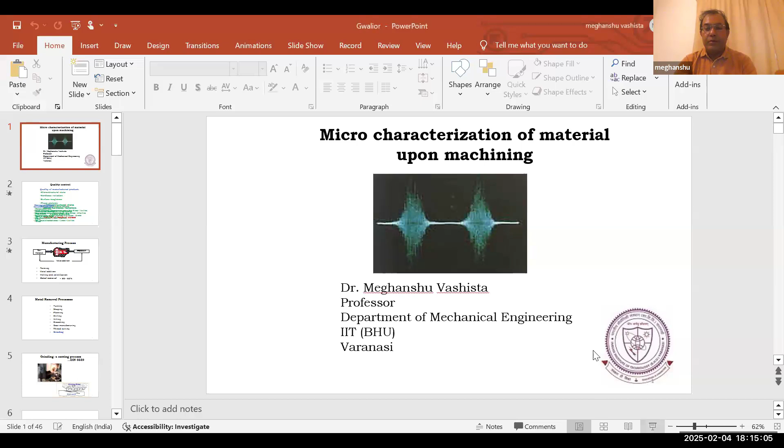The screen is visible? Yes sir, visible. Okay, so the topic of my talk, I have intentionally opted as micro-characterization of material upon machining.

Nowadays in the new industrial era, or Industry 4.0 scenario, it is very much necessary to characterize the material at the micro level, because we are going for micro manufacturing and nanotechnology. Similarly, we have also opted for micro characterization of material for improvement of quality. I have also opted this topic for machining because if we consider the machining operation's contribution in manufacturing, it is very large. So the topic of my talk is micro characterization of material upon machining, and this slide has a figure.

That figure is an indication of a signal that we will discuss during the presentation of this lecture, as this signal is very important for micro characterization of material.

Before starting micro characterization, let us discuss a very important term, that is quality control. What is the role of quality control in manufacturing, and why is it necessary to go through this?

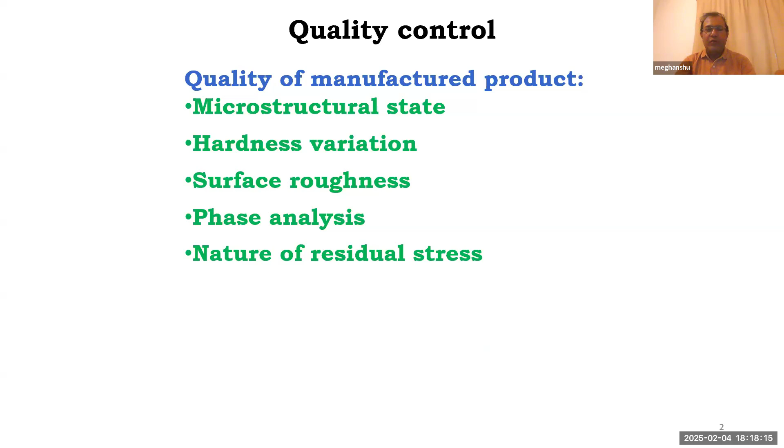Now, if we think about a manufactured product, we can judge its quality by its microstructure state, its variation of hardness from top surface to subsurface, surface variation, roughness variation, phase analysis, and nature of residual stress. So to judge the quality of a manufactured product or component, we have to assess all these parameters to check whether the quality of the produced component is okay or not. We have various conventional techniques for assessment of quality under these parameters.

We have the optical microscope that will assess the microstructural state. The cost of this microscope is around 15 to 20 lakh, and generally it takes 1 to 2 hours for assessing the metallography analysis. The micro hardness tester is an instrument used for micro hardness testing; its cost is also around 15 to 20 lakh, and the time to assess micro hardness is from 30 minutes to 1 hour.

The roughness tester is used for surface roughness. It costs 3 to 10 lakhs, and we generally take 10 minutes to use this instrument for assessment of surface roughness.

If we consider the cost of all these equipment, then it will be around 1.5 crore. And the total time taken for assessment of quality control is more than 2 hours. If we provide 2 hour time for assessment of quality control of a single product, then it is not feasible. So what is the answer with us?

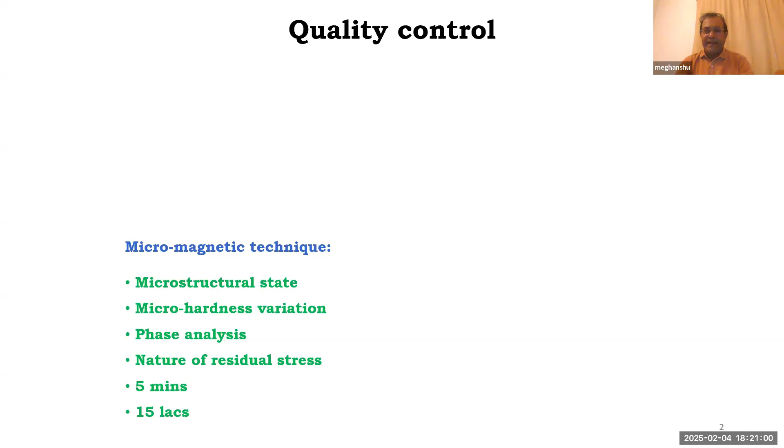This technique is used in case of manufacturing. What is the definition of manufacturing? It is conversion of raw material by some value addition into a useful product.

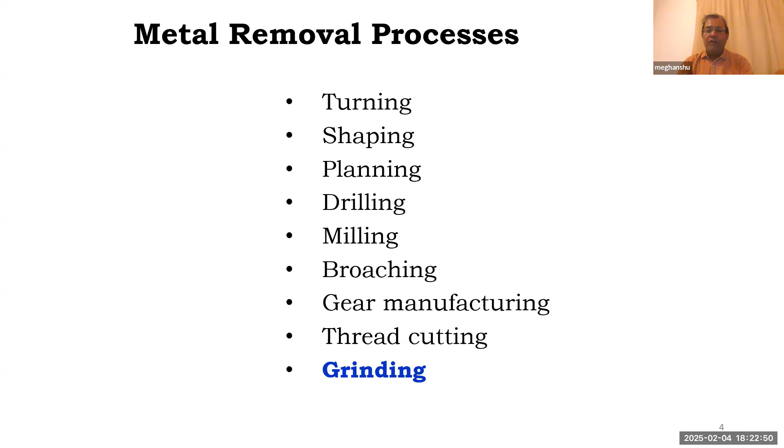Why have I kept this in blue color? Because among all these metal removal processes, or I can say among all the manufacturing processes, grinding is very important because it is used for surface finish improvement. And all the manufactured components, whether coming from welding shop, forming shop, casting shop, or machining shop, will definitely go through grinding operation. So grinding is a very important last tooling machining operation that decides the quality of the manufactured product.

Why is this heat generated in the grinding process? First, we have to see into this. In case of grinding, a grinding wheel is used, and this grinding wheel has various abrasive grits, which act as a cutting tool. In case of all machining processes like drilling, a drill bit is used; in milling, a milling cutter is used; in turning operation, a single point cutting tool is used. All these processes use a cutting tool. But in case of grinding, the grinding wheel is not a cutting tool - it has abrasive grit, and these abrasive grits act as the cutting tool.

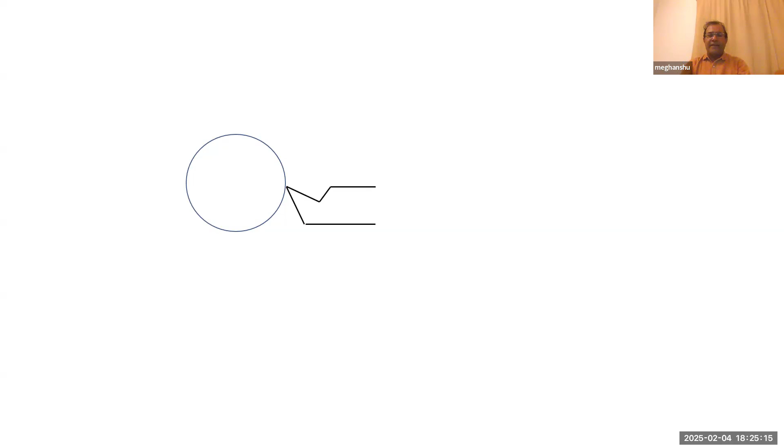We all know that if we are having a circular workpiece and a single point cutting tool, then this is the schematic of this workpiece and single point cutting tool. This single point cutting tool has a surface over which the chip will flow. The chip will flow over the rake surface, and this is the rake surface that can be indicated here.

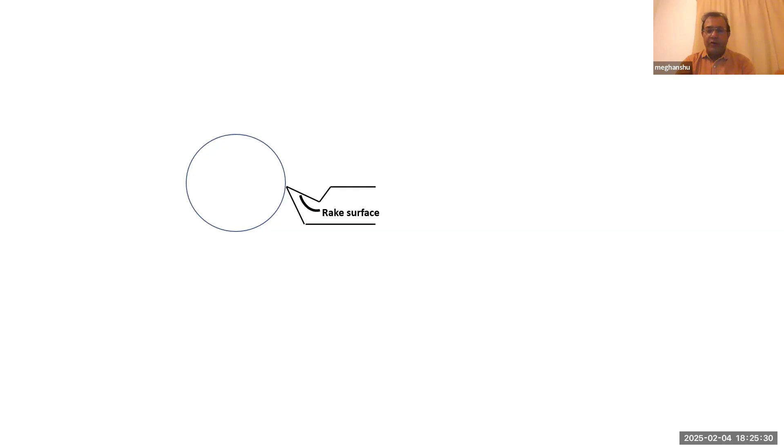To define whether the rake angle is positive or negative, we have to follow some basic principles or rules. First, we have to draw a direction, and that direction will indicate the cutting velocity.

In case of an actual turning operation, exactly at the point of contact between the workpiece and the cutting tool, we draw a tangent, and this tangent indicates the direction of cutting velocity. Then if we introduce a normal plane that is perpendicular to the cutting velocity, this plane is known as the reference plane. So we have the rake surface, the cutting velocity, and the reference plane, and these are required to define whether the rake angle is positive or negative.

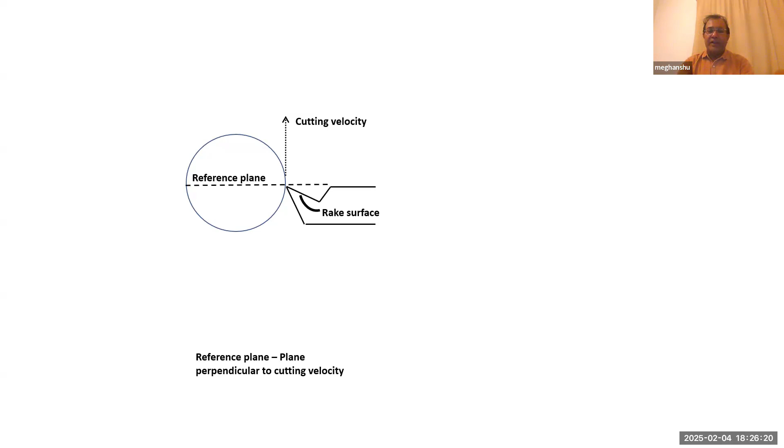If we rotate the reference plane towards the rake surface, and this direction of rotation is clockwise, then we can say this rake angle is positive. So in this schematic, if we rotate the reference plane, it is in the clockwise direction, so this angle is a positive rake angle.

Now for another schematic, let's repeat the fundamentals we discussed. First we draw a tangent at the contact point, which gives the direction of cutting velocity. Then we introduce a plane normal to the cutting velocity, and this plane is the reference plane, introduced exactly normal to the cutting velocity.

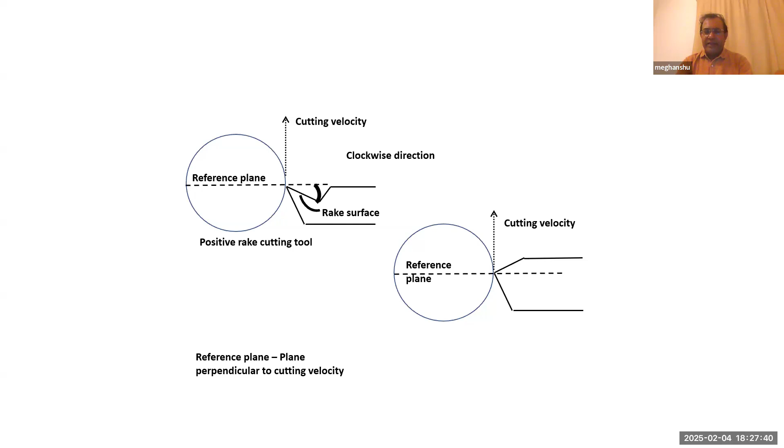Now, if we repeat the same process, we can determine whether it is a positive or negative rake angle. In this figure, if we rotate the reference plane towards the rake surface, the direction of rotation is anti-clockwise. Since the direction of rotation is anti-clockwise, we can say this is a negative rake angle.

So what is the utility of positive rake angle and negative rake angle? In machining, we can control the geometry of a single point cutting tool by providing a positive rake angle or a negative rake angle.

How does positive rake angle and negative rake angle affect machining? Suppose this segment indicates a chip flowing over the rake surface, and in this case the tool is a positive rake tool. V1 is the velocity of the chip before machining, and I am considering that after machining the velocity of the chip is V2. So what happens if we machine this workpiece material with a positive rake cutting tool?

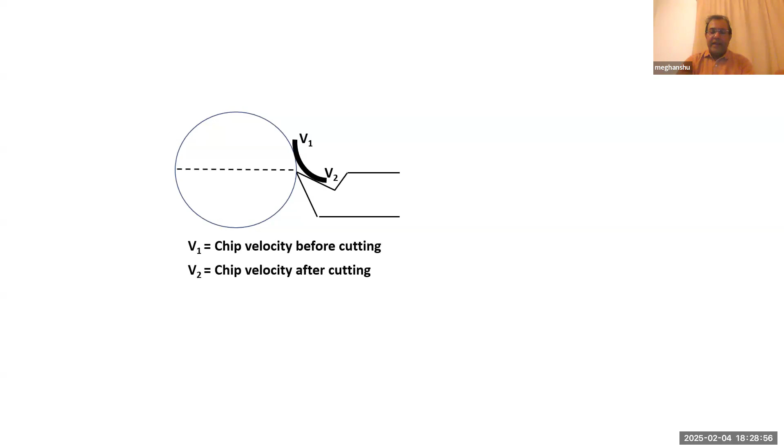Considering V1 as the chip velocity before cutting and V2 as the chip velocity after cutting, and the mass of the chip as m, I can write that mv1 is the momentum of the chip before machining, and mv2 is the momentum of the chip after machining.

Now consider machining by a negative rake cutting tool. In this case, this will be the flow of the chip. V1 is the velocity of the chip before machining, and V3 is the chip velocity after cutting. Here V1 and V3 are the velocities in case of the negative rake cutting tool.

So if we consider the change in momentum in case of the positive rake cutting tool, it will be mv1 minus mv2, and the change in momentum in case of the negative rake cutting tool will be mv1 minus negative mv3. This change in momentum for the negative rake cutting tool will always be higher than for the positive rake cutting tool, indicating that the cutting force is much larger in case of machining with a negative rake cutting tool, and that is not desirable.

Large cutting forces are always generated in case of machining by a negative rake cutting tool.

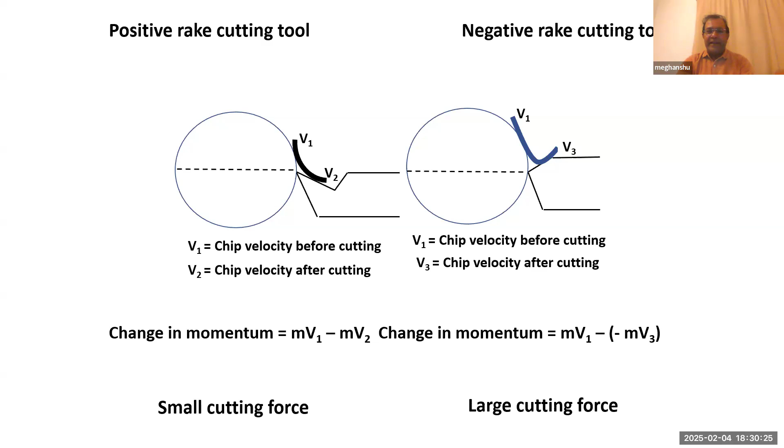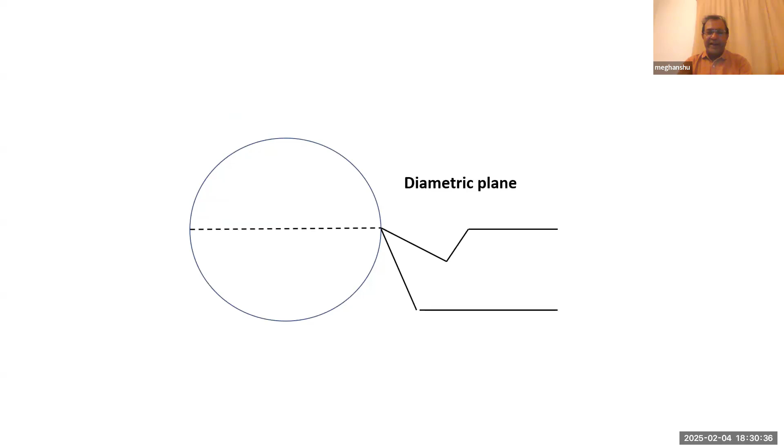In case of machining, one important fundamental is that the cutting tool should always make contact exactly at the diametric plane. Why should the cutting tool always make contact with the workpiece at the diametric plane? This is also a very important aspect related to tool geometry.

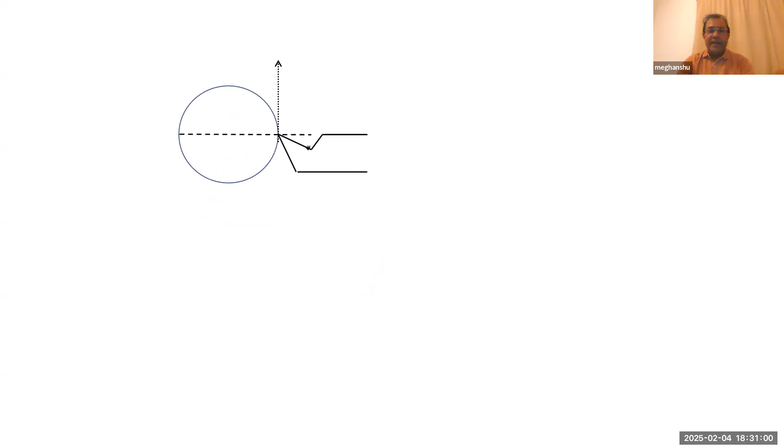If we consider that the cutting tool is having contact point exactly at the diametric plane, then this is the situation, and in this case the angle is positive rake angle. We can see that the pi-r plane or reference plane, when we move it towards the rake surface, it is clockwise direction. Rake angle approximately will be around 10 degree.

When the cutting tool is making contact above the diametric plane, what will happen? If we plot the cutting velocity and the reference plane, then this rotation will be more. So when we rotate the reference plane toward the rake surface, the value of rake angle will be different, but it will be positive. We have changed the rake angle from 10 degree to 15 degree by keeping the position above the diametric plane.

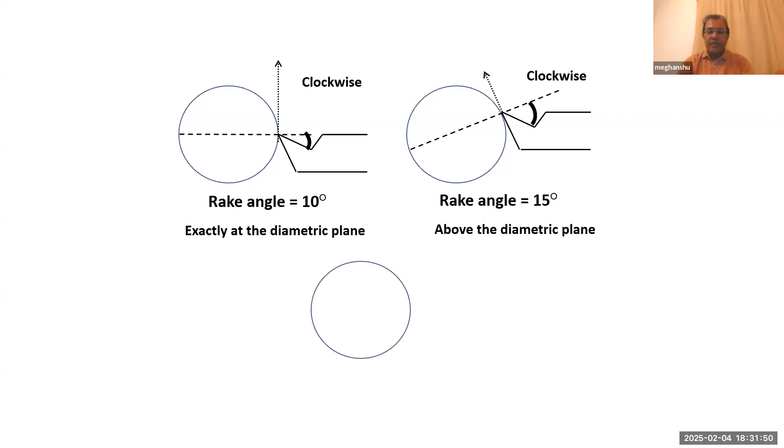Let us see what will happen when we have the position of cutting tool below the diametric plane. Suppose this is the location of cutting tool making contact with the workpiece surface below the diametric plane. This is the direction of cutting velocity exactly at the contact point. If we draw a tangent, then this will indicate the direction of cutting velocity.

If I introduce a normal plane to this cutting velocity, then this normal plane is the reference plane. According to fundamental, I have to rotate the reference plane towards the rake surface. If I rotate this towards the rake surface, then this angle will be negative, because the direction of rotation of pi-r plane towards the rake surface is anti-clockwise. So this rake angle is negative.

So I have been given a cutting tool. The tool geometry is indicating that the rake angle is 10 degree. But if I change the location of this single point cutting tool over the workpiece surface, then I will change the rake angle of the cutting tool, and that is not desirable. So we always have to keep the contact point exactly at the diametric plane.

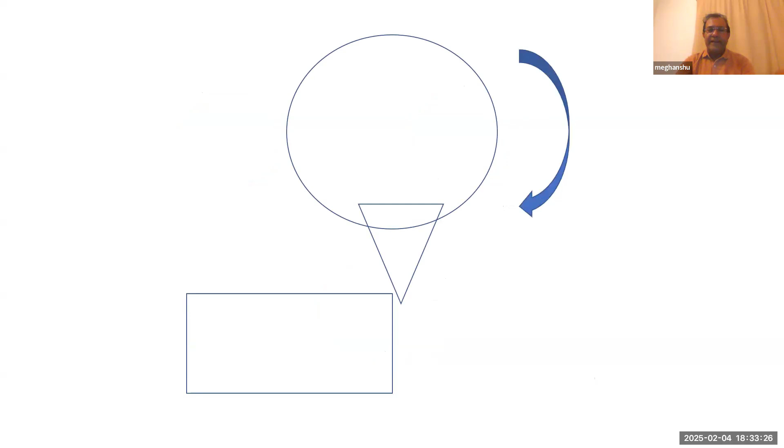Now, what will happen in case of grinding? Suppose this is a single abrasive grit, and this rectangular box is the workpiece. At the contact point, the grinding wheel is rotating and the abrasive grit is making contact. If I plot a tangent, then this is the direction of tangent, indicating the cutting velocity.

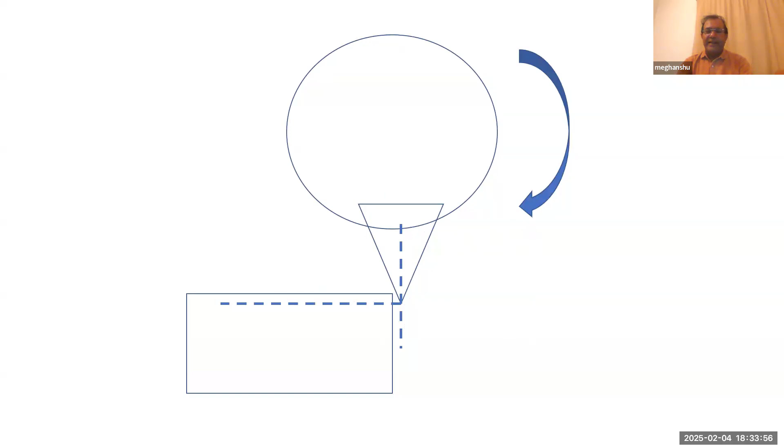This normal plane is indicating the location of reference plane, and the chip surface is the rake surface. So we can say that if we rotate the reference plane towards the rake surface, it is clockwise, and this is indicating that we are machining with a negative rake cutting tool.

Unfortunately, we are machining or providing surface finish to the manufactured component by a cutting tool having negative rake angle, and this negative rake angle is highly negative. Whenever we provide the negative rake angle, we generally keep its value around minus 10 degree to minus 15 degree or minus 18 degree at most, because if we increase the negativity of rake angle, then definitely a large amount of force will be generated and a large amount of heat will be generated, and that is not desirable.

But it is very unfortunate that we do not have any control over the geometry of these abrasive grits, nor are we able to control their shape in case of grinding. That is why we are using highly negative abrasive grit in this machining operation, which generates spark. And spark danger is something we have seen.

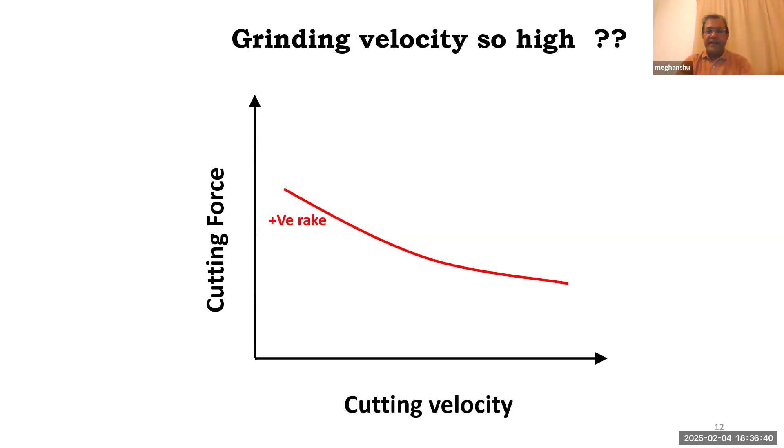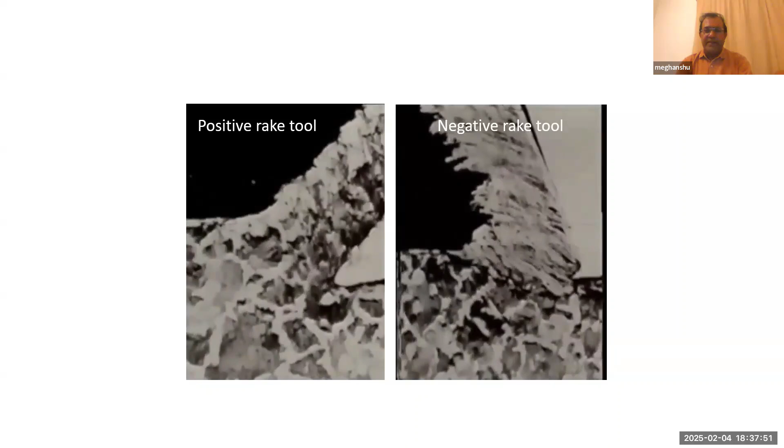This is a simulation video of positive rake cutting tool machining and negative rake cutting tool machining. You can see that in case of machining with negative rake cutting tool, the large amount of plastic deformation of the workpiece surface clearly indicates that large cutting forces are generated during machining. You can see the chip formation in case of negative rake cutting tool, having large serration marks at the top surface, indicating that a large amount of force is generated in machining with negative rake cutting tool. So this is not desirable.

We have seen that in case of grinding operation, the last tooling operation, sparks are generated and we cannot control the sparks because the abrasive grit that we are having has a large negative rake angle, and this large negative rake angle produces a large amount of heat. This large amount of heat is transferred or transmitted during the machining. Various sources act as transfer media in case of this heat transfer.

What are those sources which act as transmitting media for transfer of this heat? Coolant is there, air is there, which transfer some amount of heat. Some amount of heat will go to the chip, and a very small amount of heat will go toward the grinding wheel or abrasive grit. Why is very little heat transmitted towards the abrasive grit? Because generally we use abrasive grit made of alumina and silicon carbide, and these materials have poor thermal conductivity. That is why very small amount of heat is transferred to the abrasive grit, and because of the high thermal conductivity of the workpiece, a large amount of heat is transferred to the workpiece.

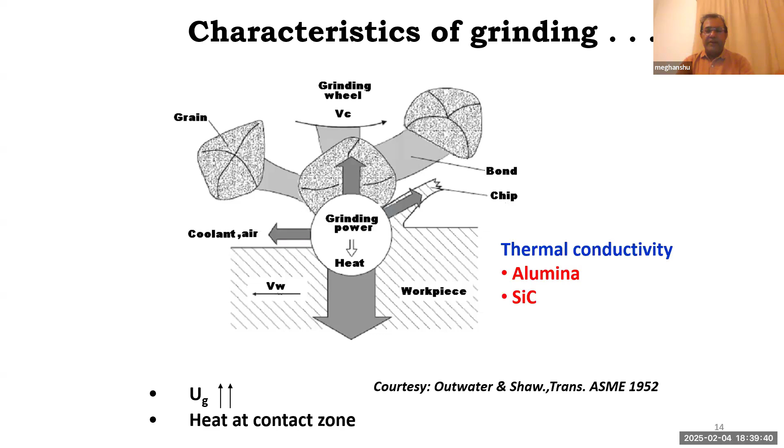You can see the large size of the arrow, which indicates that a large amount of heat is transferred to the workpiece. This is also not desirable for quality control of the workpiece, because it will affect or distort the quality, and the detrimental quality of the workpiece is not desirable for the customer or for the field application.

This elevated temperature condition or grinding heat will induce grinding burn. It will also result in metallurgical changes, micro hardness variation, surface and subsurface cracks, as well as introduce tensile residual stress in the workpiece component or manufactured product.

This tensile residual stress is detrimental. According to literature and the research outcomes of various scientists, tensile residual stress is a main problem in grinding, and it is not desirable by any customer. This tensile residual stress detrimentally reduces the static strength and fatigue life of the product.

So why is this tensile residual stress detrimental? Suppose I am having this component. If it undergoes some manufacturing process that induces compressive residual stress, that means the direction of residual stress will be compressive, and it will compress the component. In that case, if the component has voids, porosity, or cracks, all these will be suppressed, and their size will be reduced because of this compression action by the compressive residual stress.

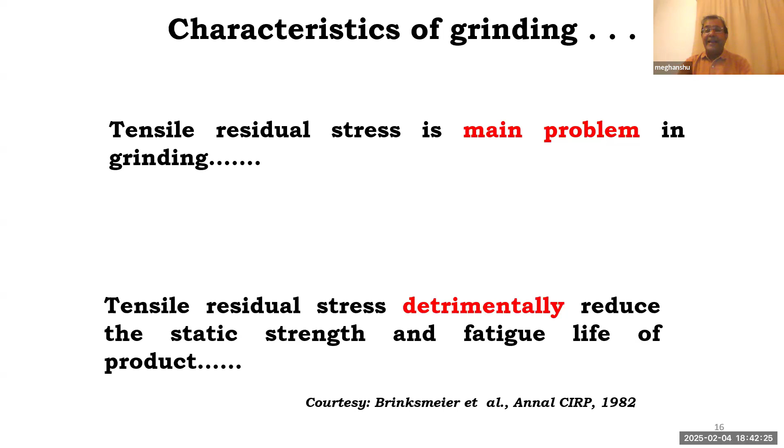That is why we have to always assess the tensile residual stress. It is very much important in comparison to other parameters like microstructure, micro hardness, or surface roughness. We can manage the surface roughness, we can play with poor surface roughness, but if the component is having tensile residual stress, then it will be very much detrimental.

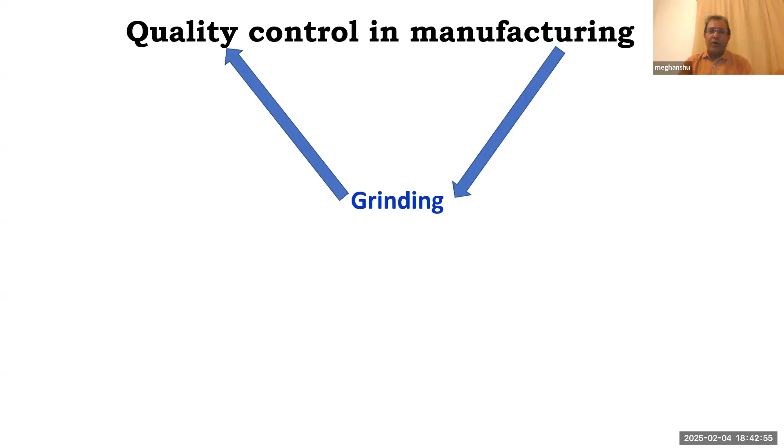We have seen that in case of quality control in manufacturing, we have a last tooling process. In manufacturing, this last tooling process is called grinding, and grinding uses abrasive grit which has a highly negative rake angle. Because of this high negative rake angle, it induces heat, and this heat will reduce or destroy the quality of the product, because it induces thermal damage in terms of induction of tensile residual stresses.

These tensile residual stresses are very much detrimental as per the global industrial record, or as per the outcome of research scientists who are working in the area of manufacturing.

So if we consider this block as a component, and this component has cracks at the surface level, the component is also having void or free space, and it also has some porosity. So we know any manufactured or produced component is not 100% accurate because it has all these imperfections or impurities.

So if the component has all these impurities and also has tensile residual stress, which will elongate the component in this direction, what will happen to these cracks, porosity, or void? All these will get enlarged like this. You can see enlargement of crack, enlargement of void, enlargement of porosity. So when these get enlarged, they will detrimentally reduce the static strength and fatigue life of the component.

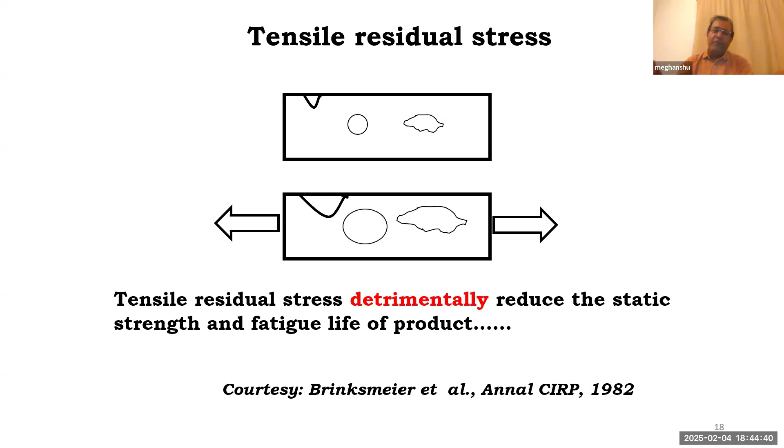That is why trusses, bridges, or other important structures, if they have this tensile residual stress, fail before their service life. You have seen in the news that there is a crack over the bridge, a crack over the trusses of a railway overbridge, or cracks over the railway track. Why are these cracks coming? It is because of induction of tensile residual stress inside the manufactured product.

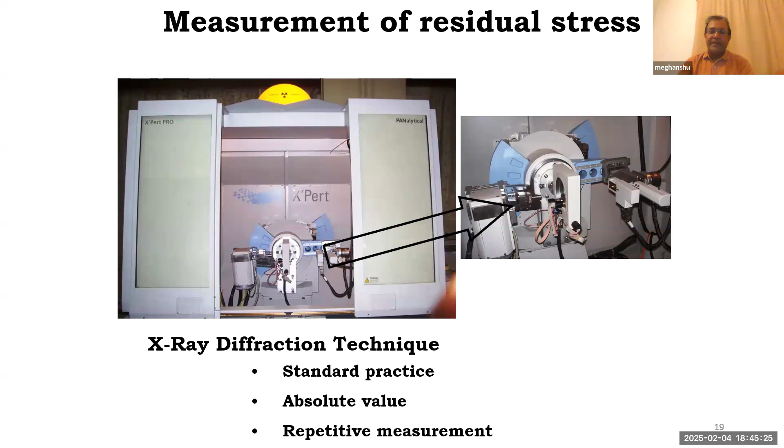We have to measure the residual stress, and a very popular and well-established technique is X-ray diffraction technique. This is a standard practice for measurement of residual stress. It provides an absolute value in megapascal of the residual stress, and the measurements are repetitive. That is the advantage of this technique. This technique is based on Bragg's law.

But there are some limitations of X-ray diffraction technique. What are those limitations? The limitation is that measurement time is higher. In case of X-ray diffraction technique, we usually have to scan the component at 5 different locations, and this 5 scan will take a minimum of 55 minutes.

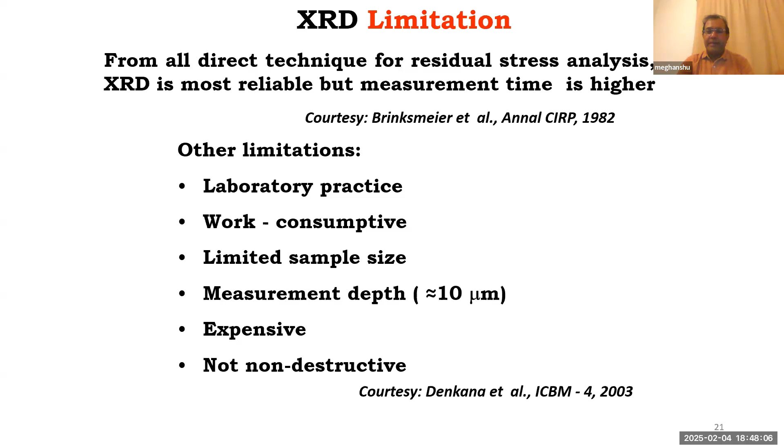Now we are having a very good micromagnetic technique. The name of that technique is the Barkhausen Noise technique, and this technique has various advantages, or superiority, over the established and popular X-ray diffraction technique.

This technique is faster. You can scan and get the complete history of any manufactured component within 5 minutes. The depth of penetration or depth of measurement is also very high in comparison to the X-ray diffraction technique, so we can assess more depth of the manufactured component.

The equipment is portable. It has a box shape with 7 kg weight. So you can carry this 7 kg equipment in your hand to the field application, to the railway track, or to the railway bridges, and you can assess the quality at the field.

Any complex shape can be analyzed, like a gear tooth or a spline shaft. They can be easily analyzed by this technique. And this technique has the biggest advantage: it is non-destructive in nature, so it's a user-friendly technique.

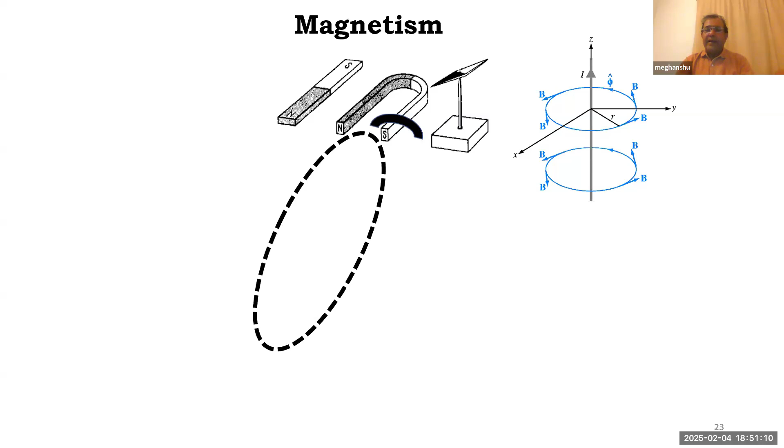So if we consider an electromagnetic field, it is generated by the flow of current. Any flow of current will generate a magnetic field, and the direction of this magnetic field is always perpendicular to the flow of current. Suppose current is flowing in this direction, then all magnetic field will be generated in the perpendicular direction to the flow of current.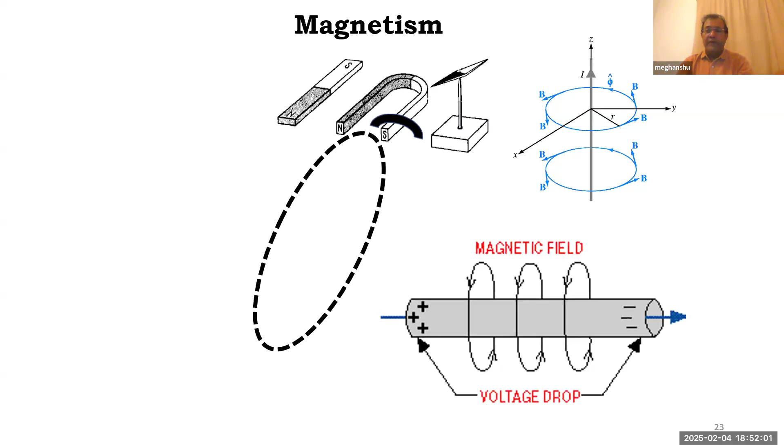So we can say that any flow of current will generate a magnetic field, but current is nothing but the flow of electrons. So principally, we can define that any flow or movement of electrons will generate a magnetic field.

And inside the material, we also have free electrons, or these electrons are moving in an orbit around the nucleus. So if we go through the fundamentals, these electrons will also generate a magnetic field, because we have seen that any flow or motion of electrons will generate a magnetic field.

So will this flow of electrons generate a magnetic field or not? This flow of electrons inside the material will generate a magnetic field. Can we see that magnetic field? We can see the microstructure of the material by using an optical microscope.

And nowadays we have a sophisticated device. With the help of this device, we can see the magnetic field. So we have an instrument called magnetic force microscopy analysis. This analysis will let us see the magnetic field.

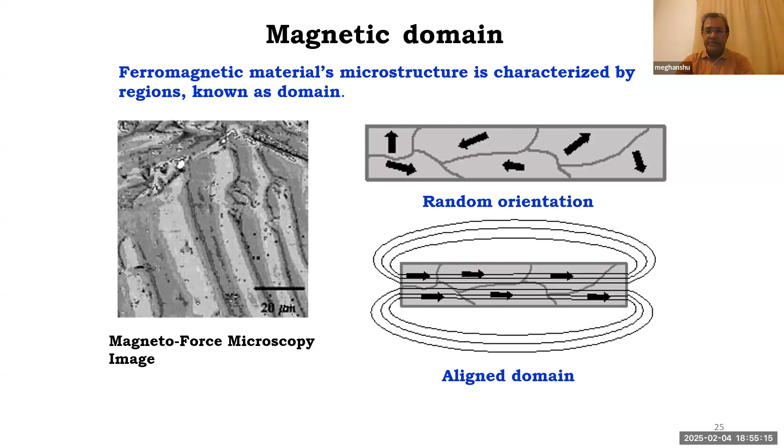We can say that when we apply some magnetic field, magnetic domains will get energized, and these energized magnetic domains are in disturbed condition, so they will align by moving themselves in the direction of magnetic field. So one thing I want to highlight here, this is the motion of magnetic domain inside the material.

Now, suppose I am having an ammeter here and a permanent magnet here. There is no connection, no wire connection between this ammeter and this permanent magnet. If I move this permanent magnet towards the ammeter, then the needle of ammeter will deflect. The needle of ammeter will deflect if I move it towards or away. This will indicate that this motion of permanent magnet is generating a voltage pulse. This motion of permanent magnet is generating a voltage pulse if I move it like this.

This voltage pulse is again generated during the motion of this magnetic domain inside the material, and that pulse is in the form of an electric pulse, which we can easily sense with the help of a very simple sensor in the form of a signal.

So when we apply electromagnetic field over the material, this magnetic field will disturb the magnetic domain and we will get a pulse. This pulse is very important to assess the quality control of manufactured product. You may be knowing that in old days, doctors used to assess the health of the patient by measurement of this pulse.

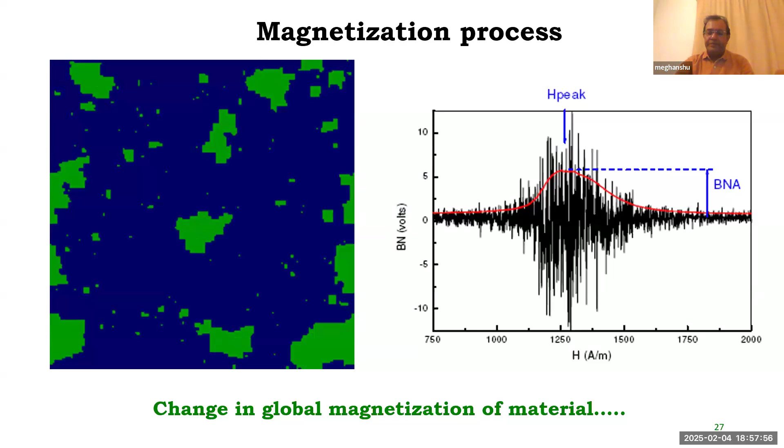This burst or signal was first discovered by Professor Heinrich Georg Barkhausen. He was a German professor, a very well-known scientist. In the memory of Professor Barkhausen, Germany released a stamp, and he first discovered this signal with the help of a very small loudspeaker.

You can also go through the experiment of Professor Barkhausen on YouTube. Just type into Google or YouTube 'Barkhausen noise setup' or 'Barkhausen noise experiment', or 'basic Barkhausen noise setup' or 'basic Barkhausen noise experiment'. You can easily see the electromagnet connection with the loudspeaker, and when the iron bar inside the coil is moved, you will get a rushing sound from the loudspeaker.

So this setup can be used for your undergraduate or postgraduate student project. It is very good, and this can be a UG level project also. So this signal was assessed by Professor Barkhausen with the help of a loudspeaker, and that signal's name is Barkhausen noise signal.

This signal is captured, and with the help of an envelope, we characterize it by its peak value or its peak position. Suppose we have a graph with applied magnetic field on the x-axis as input, and Barkhausen noise signal magnitude on the y-axis. If we plot this graph, the curve has a peak value and a peak position.

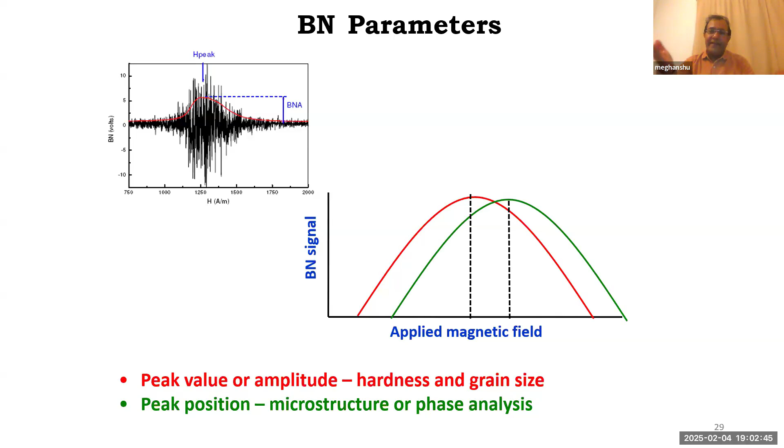So using this technique, we can assess grain size, micro hardness, microstructure, as well as residual stress.

This technique is based on magnetism. In magnetism, the magnetic domain wall moves, and this motion inside the material always occurs along two paths: magnetization and demagnetization. The curve with these two paths — magnetization and demagnetization — forms a closed loop called the hysteresis loop of magnetization.

Each path, whether magnetization or demagnetization, generates a Barkhausen noise signal. So the magnetization process generates a Barkhausen noise signal, and the demagnetization process also generates a Barkhausen noise signal.

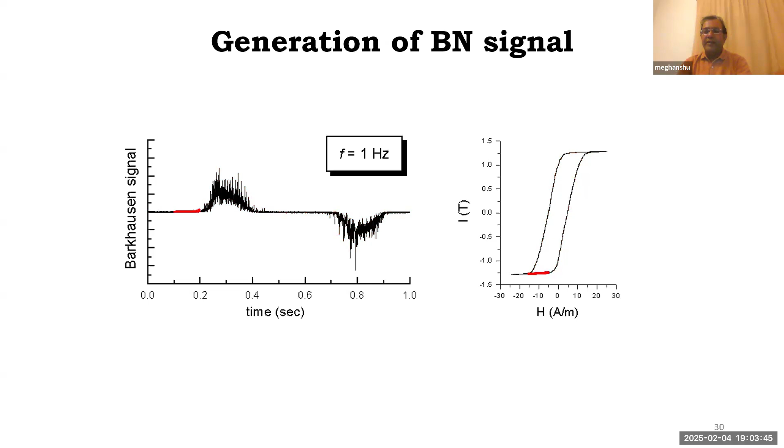We can play with the frequency of the applied magnetic field. By changing this frequency, we can change the strength or penetration of the magnetic field according to our requirement or the property of the workpiece material.

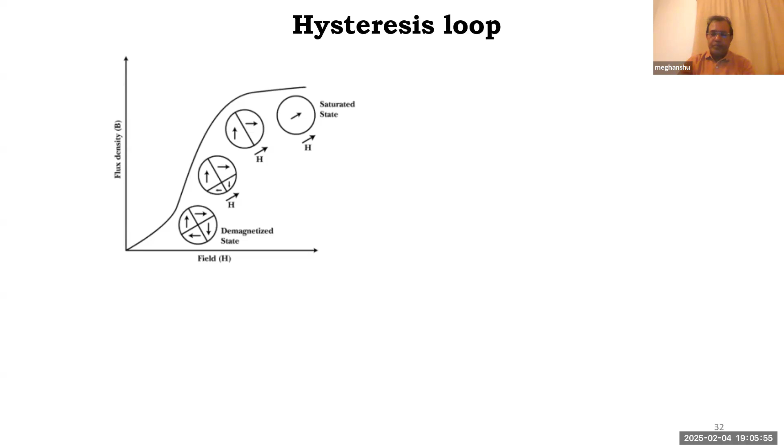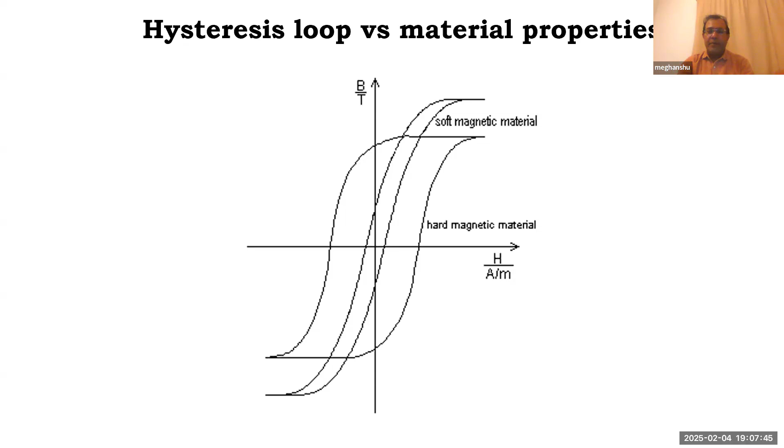So we have derived a connection between mechanical property and magnetic property. These magnetic properties have a direct connection with the mechanical property to assess quality control in manufactured components.

You know very well that in the case of X-ray diffraction technique, we use X-rays, and X-rays are harmful. You may have had this experience during a health checkup: the person taking the X-ray covers himself in a shield, which protects him from the harmful effects of X-rays. So X-ray is harmful for our body, and that is used in the X-ray diffraction technique.

But in the case of this micromagnetic technique or Barkhausen noise technique, it is not harmful, because if I keep a permanent magnet in my hand for a few hours, nothing is going to happen with my health. But if I expose my body to X-rays, it is definitely detrimental or harmful for my body.

We have seen that Barkhausen noise technique or micromagnetic technique generates a Barkhausen noise signal as well as a hysteresis loop. The hysteresis loop has two paths: one is demagnetization, the other is magnetization. Each path, whether magnetization or demagnetization, generates a Barkhausen noise signal.

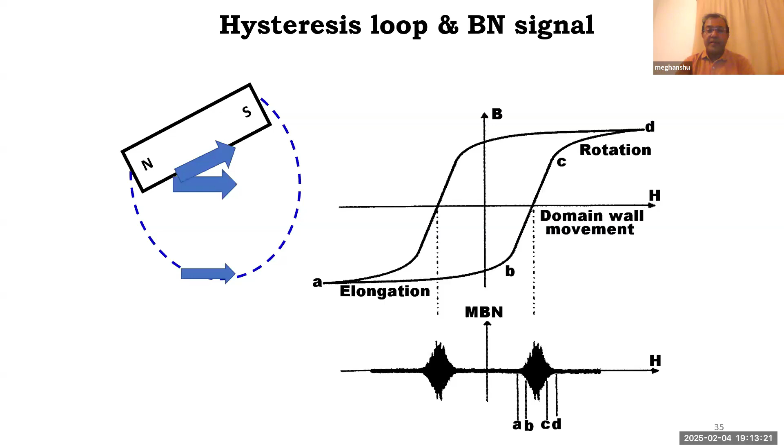But after this, the domain will not stay in this position. It will always rotate itself in the direction of the magnetic field. This rotation of the domain is indicated by C to D, and this rotation of the domain wall contributes very significantly to the Barkhausen noise signal. So we have three paths: elongation, domain wall movement, and rotation, all very important for assessment of residual stress. This is the Barkhausen noise signal and hysteresis loop.

This hysteresis loop has intersection points at the x-axis and y-axis. These intersection points are named remanence and coercivity, which are magnetic properties. You can see the location of remanence and coercivity in this graph. The intersection with the y-axis is remanence, and the intersection with the x-axis is coercivity. These magnetic properties are related to grain size and hardness, which are mechanical properties.

By assessment of these magnetic properties, we can assess grain size and hardness. If I draw a tangent at the knee of the hysteresis loop, the slope of that tangent will indicate permeability. I can easily find the hysteresis loop area using software like Microsoft or PDF tools, and this area will indicate the microstructure. So all these mechanical properties can be assessed by this hysteresis loop, and residual stress can also be assessed if we compile all the discussion we have carried out till now.

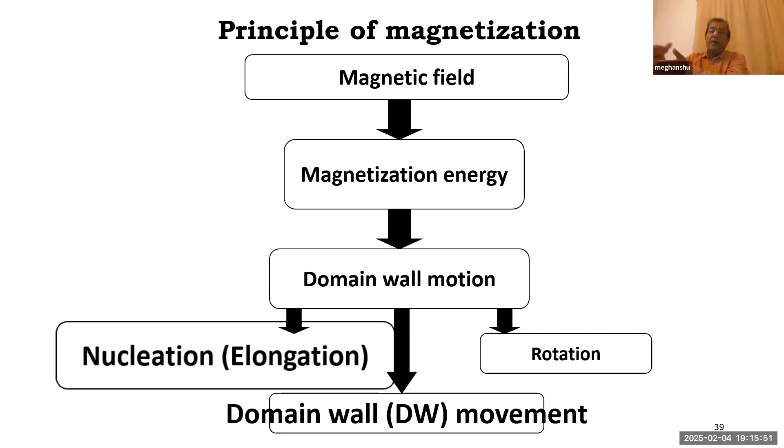In the discussion we've carried out so far, when we apply a magnetic field over a material, it supplies magnetization energy to the domain walls of the material, and this energy energizes the domain walls. They first try to move in the form of elongation - this is the first stage of domain wall motion. Second is domain wall movement, which we've seen in the domain and permanent magnet example. Then the domain wall rotates to align itself with the direction of the magnetic field. So this block diagram shows that if we supply magnetic field, it provides magnetization energy for motion of the domain wall in three stages: nucleation, magnetic domain wall movement, and rotation. This magnetic field is divided into three parts for magnetic domain wall motion.

Now, suppose the component has undergone a grinding operation. We have seen that grinding induces tensile residual stress. So this component, having undergone grinding, will have tensile residual stress induced in it, meaning it will elongate everything. It will elongate the voids we saw in the schematic diagram. This tensile residual stress will elongate porosity, cracks, as well as elongate the magnetic domain wall.

I repeat, the tensile residual stress induced by grinding will elongate porosity, void, grain size, crack, as well as the magnetic domain wall. So when the component is having...

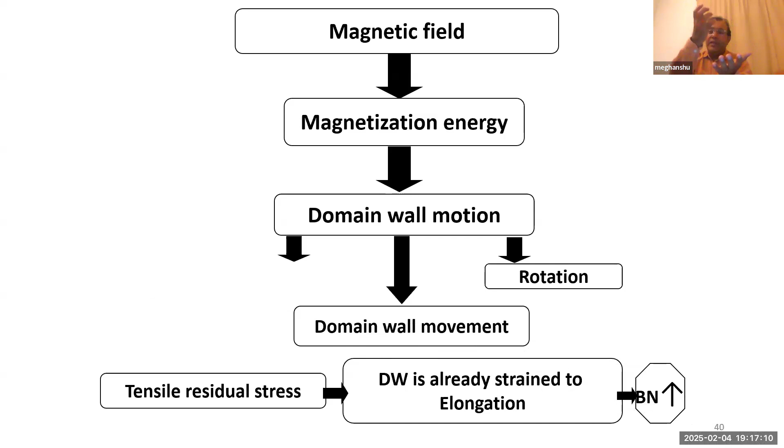grinding operation, this nucleation or elongation part has been carried out by the grinding operation itself. Now, if we apply the same magnetic field over it, this complete magnetic field will be distributed only in two components, that is magnetic domain wall movement and rotation, because the elongation part has already been executed by the grinding process itself.

So in grinding, the domain wall is already strained to elongation, and the magnitude of Barkhausen noise signal in case of inspection of ground component after grinding, the Barkhausen noise signal level will rise.

So qualitatively, we can easily assess the amount of residual stress in a manufactured component using this technique, which is very useful nowadays. This technique will provide information regarding the residual stress, whether it is increasing or decreasing, qualitatively. This information is very much useful, and the technique is very much preferred in the research and development sector, because it is an emerging technique.

This emerging technique supports the environment because it is not using any chemical. We use chemicals in case of metallography technique - we use the etchant, we use the polishing agent in case of etching. In case of micro hardness analysis or metallography analysis, these agents and chemicals are not good for the skin of the operator or for the environment.

X-ray diffraction technique is also using X-ray, which is not good for the health of the operator. But this technique is only using magnetic field, and that does not have any harmful effect on the operator or the environment.

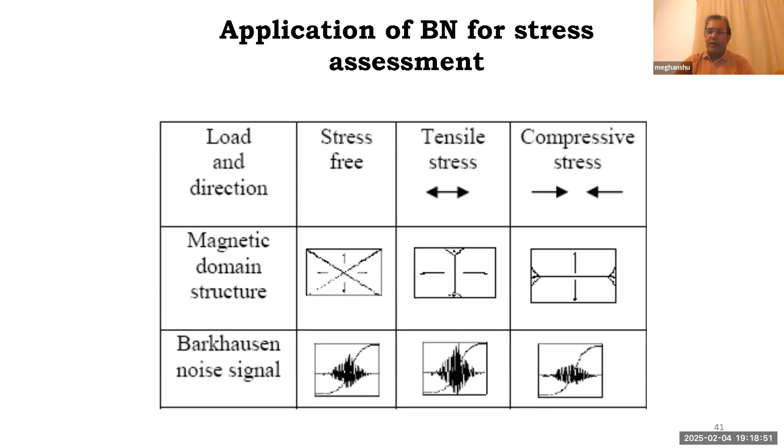If you are in the teaching field, you can provide a UG level or PG level project by demonstration of Barkhausen noise signal using the electromagnet yoke and sensor. I have also given the same problem demonstration of Barkhausen noise signal to my student. My MTech student demonstrated this, and the cost of setup was 2,753 rupees. I repeat, in 2,753 rupees, we demonstrated the generation of Barkhausen noise signal using a very low level setup - a magnetizing yoke, an electromagnet, and a loudspeaker also.

So you can also use this information. You can use the information available on YouTube or on Google to prepare the setup for this Barkhausen noise signal generation, and it is very good. It is also a very good learning experience for your students also.

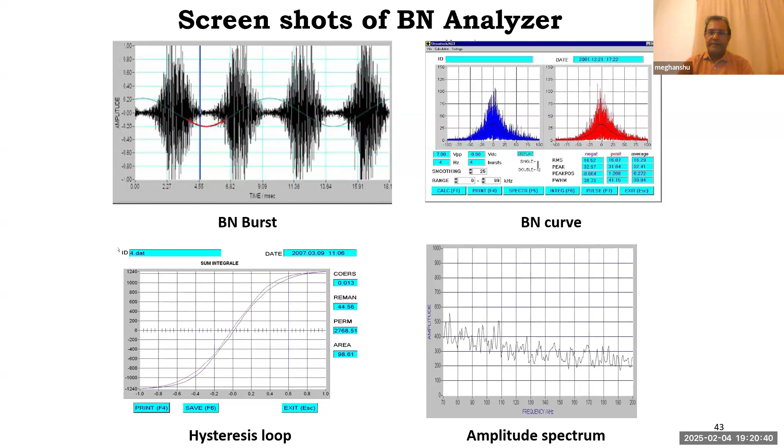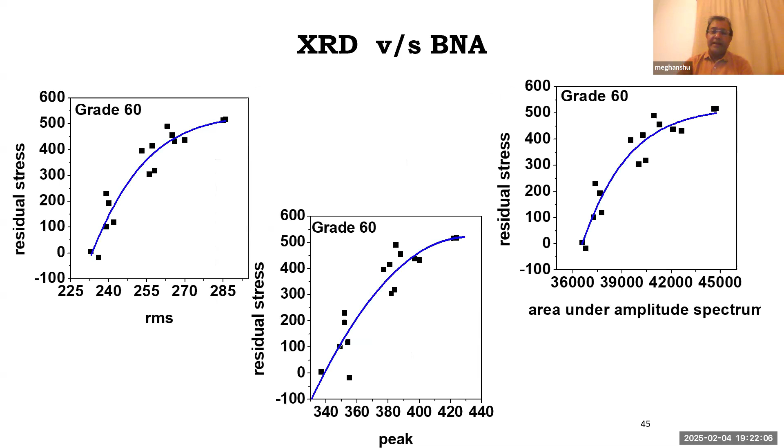So these are various graphs between X-ray diffraction technique data and Barkhausen noise technique data. You can see that a very good correlation has been obtained between the results from Barkhausen noise technique and X-ray diffraction technique. So this technique has established its usefulness in measurement of residual stress in comparison to the X-ray diffraction technique that you can see here.

So this is all about the Barkhausen noise technique, this useful technique that is preferred nowadays. It is an emerging technique in industries, in modern manufacturing industries, for micro level characterization of components for assessment of quality.

This technique is also available in India. IIT Kharagpur has this technique. BARC Mumbai has this technique. IGCAR Kalpakkam also has this technique. Industries like Bharat Forge also have this technique. So in India, 10 to 15 industries and teaching institutions also have this technique.

You can also develop this technique. Available setups are there on YouTube, and it is a good learning experience for you also. So that is all from my side about this emerging technique.

I have also used this technique, the Barkhausen noise technique, an earlier version, in IIT Kharagpur, and I have also used the same higher version at Newcastle, England during my postdoc there.

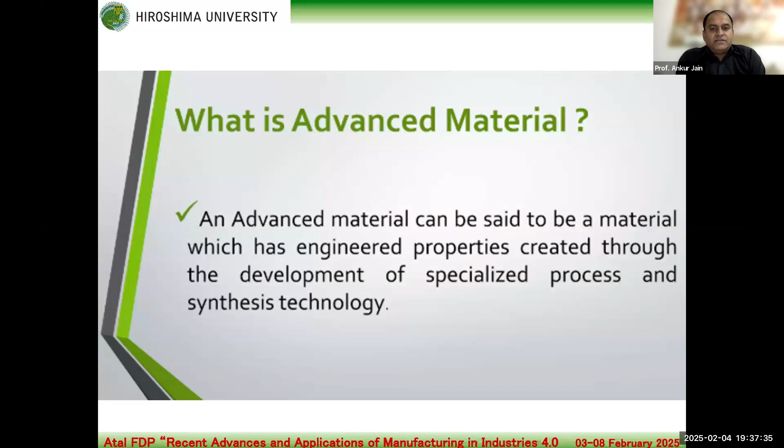So let me start with section 1, related to advanced materials. What is actually advanced material? Advanced materials are nothing but materials which are developed through specific techniques, specific synthesis technology, and specialized processes with several beneficial properties. They are very novel. They have improved properties in comparison to their benchmark or parent material, such as better weight, better strength, better conductivity, and many other properties needed for different applications.

These are some examples of advanced materials. According to the use, for example, if we want light metals, we can develop special materials based on titanium, magnesium, or aluminum. Recently, we have developed several composite materials which are strengthened and also lightweight. For example, carbon fiber is a good example of this. There are also several nanomaterials and nanocomposites.

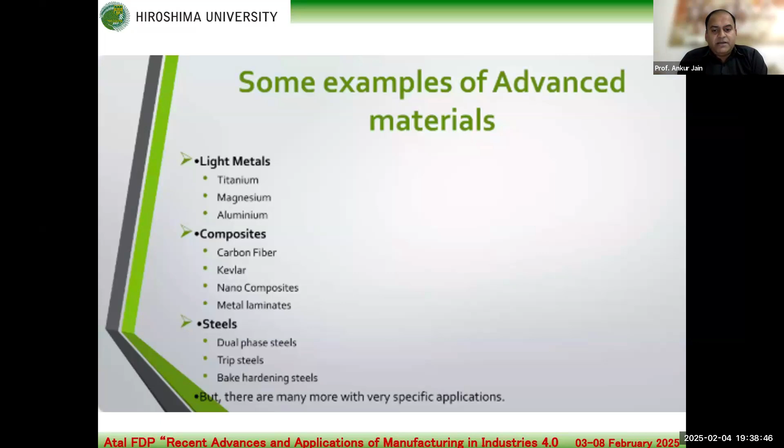Steel is quite conventional technology. However, several new materials based on steel have been developed that are classified as advanced materials. Apart from light metals, composites, or steel, there are several other materials which can be developed for specific applications. Why are they important, and what is their place in manufacturing industries? They have several improved properties.

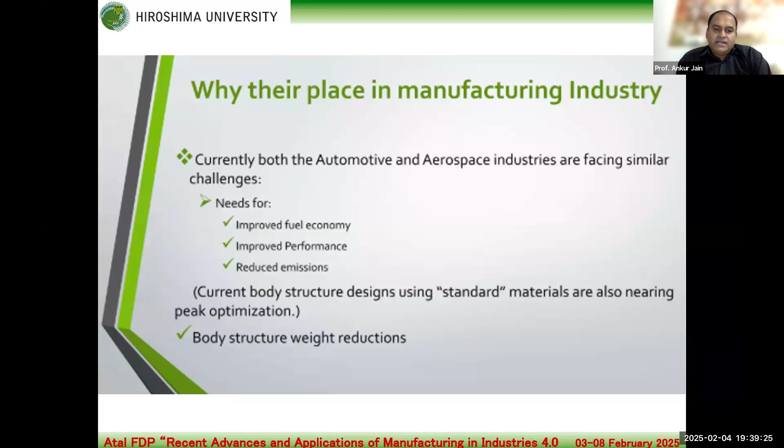These are the examples. If I talk particularly about two industries, automotive and aerospace, they are facing a lot of challenges and there is a need for improved fuel economy. If you make very lightweight aerospace structures, it will improve fuel efficiency, improve overall performance, and reduce overall carbon emissions. We also need very lightweight body structures, so these materials are very important for several applications.

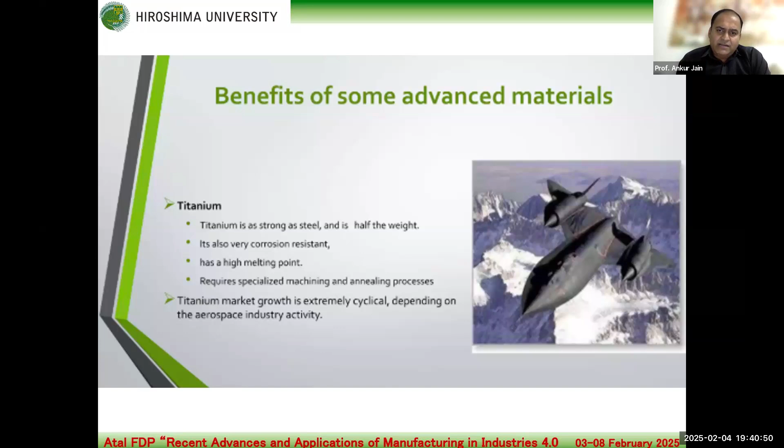Another material is titanium, which is very strong similar to steel, but the weight is quite smaller than steel, only half the weight. Compared to steel, it is also corrosion resistant, so there is no problem of corrosion. It has a very high melting point, which requires specialized machining and annealing processes. The market for titanium is also growing very fast in recent years.

A very recent example is the category of nanocomposite materials that have been developed. They have 98% stiffness improvement, higher heat deformation temperature, and several other benefits mentioned on this slide.

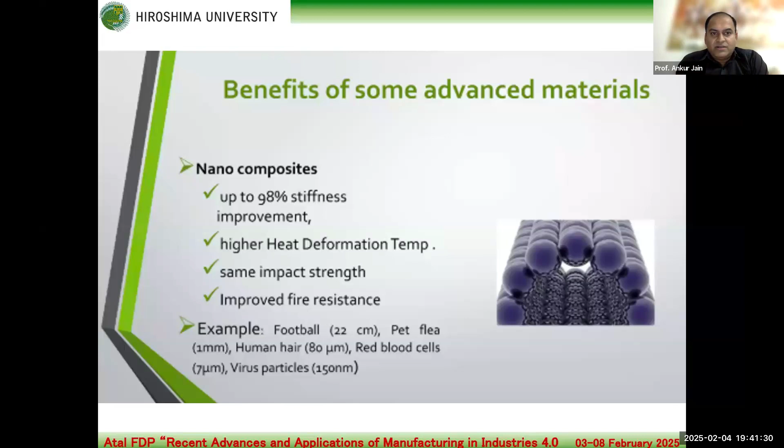Now I will come to the next section, related to nanotechnology and nanomaterials. What is nanotechnology actually? Nanotechnology refers to the construction and engineering of functional systems at the atomic level. It is written here as 'micro level', but that is not the literal meaning of micrometer size. It means that when we are dealing with material at the atomic level, that is termed nanotechnology.

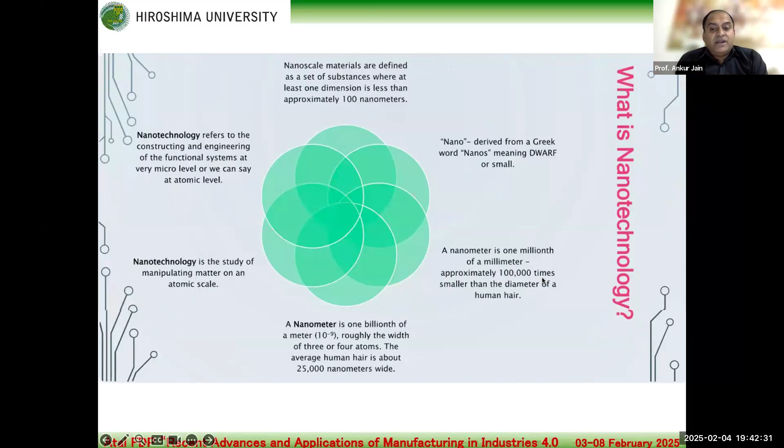Nanoscale materials are defined as a set of substances where at least one dimension of that material is less than 100 nanometers. So whenever we talk about 500 or 600 nanometers, remember that is not classified as nanomaterial or nanotechnology; the dimension should be smaller than 100 nanometers. A nanometer is one billionth of a meter, 10 to the minus 9, which is approximately 1 lakh times smaller than the diameter of human hair. This is the beauty of nanotechnology.

The concept was first presented in 1959 by Dr. Richard P. Feynman. Then the well-known term 'nanotechnology' was coined by Japanese scientist Norio Taniguchi in 1974. With the invention of the scanning tunneling microscope in 1981, which was capable of observing nanostructures in the true sense, that marked the beginning of the emergence of nanotechnology.

These nanomaterials can be divided into three major categories. The first is one-dimensional material, which has only one parameter: either length, breadth, or height. This dimension should be less than 100 nanometers; only then will it be considered a one-dimensional nanomaterial.

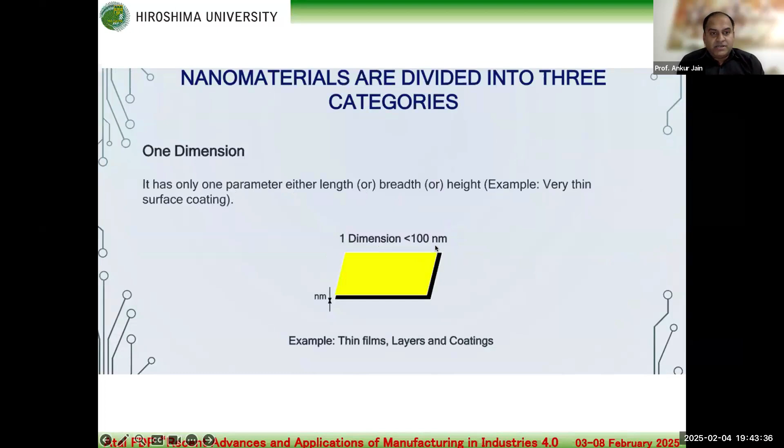The second category is two-dimensional, where it has two parameters: length and breadth. Both parameters should be in the range of 100 nanometers, or at least one dimension should be less than 100 nanometers, to be considered a two-dimensional nanomaterial.

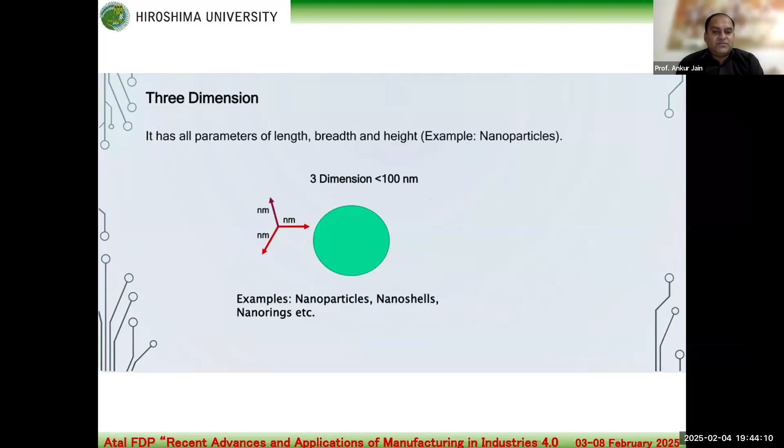The third category is three-dimensional nanomaterial, which has all the parameters of length, breadth, and height. All three dimensions can be smaller than 100 nanometers, or at least to qualify the definition of nanomaterial, it should have at least one dimension less than 100 nanometers.

What are the properties? These nanomaterials can show different properties at nanoscale for two different reasons. The first one is nanoparticles can make materials which are more chemically reactive, and they can affect their strength or electrical properties. The second is quantum effect that can begin to dominate the behavior of matter at nanoscale.

So actually the properties of nanomaterials are quite different from the bulk material. A bulk material should have constant physical properties in general, but when it comes to nanomaterial, the properties can be drastically changed.

Then to understand nanoparticles or nanotechnology, there is an important parameter, surface area to volume ratio. We can understand this from this figure.

Here I am showing two blocks. One is a complete block and one is a set of 8 different blocks. If we calculate, the surface area is related to height into width into number of sides into number of cubes. So for this, we have total number of sides is 6 and number of cubes is 1. So the volume will equal height into width into length into number of cubes.

For example, if we talk about the left hand side cube, the surface area is 2 into 2 because the length and width is 2 mm and 2 mm, that is 2 into 2, and total faces we have 6 and the number of cubes available is 1. So the total surface area in millimeters will be 24.

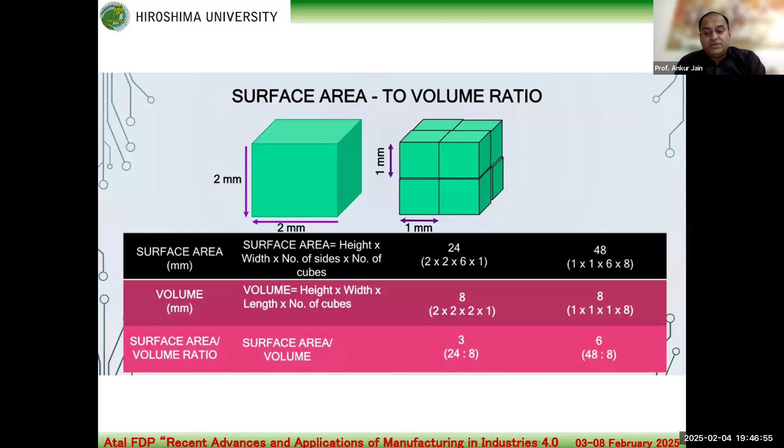Now we are splitting the same cube into 8 pieces. In this case, it will give the surface to volume ratio 48 divided by 8, that will be 6. That means when we break this whole cube into 8 different pieces, the surface area to volume ratio is increased. And that increase in surface area to volume ratio drastically changes the properties, resulting in different properties including catalyst activity, because we have larger surface area to allow the reaction to a greater extent.

This nano size effect can affect several properties. For example, physical properties including melting point, chemical properties such as reactivity. They can also modify electrical, mechanical, and optical properties as well.

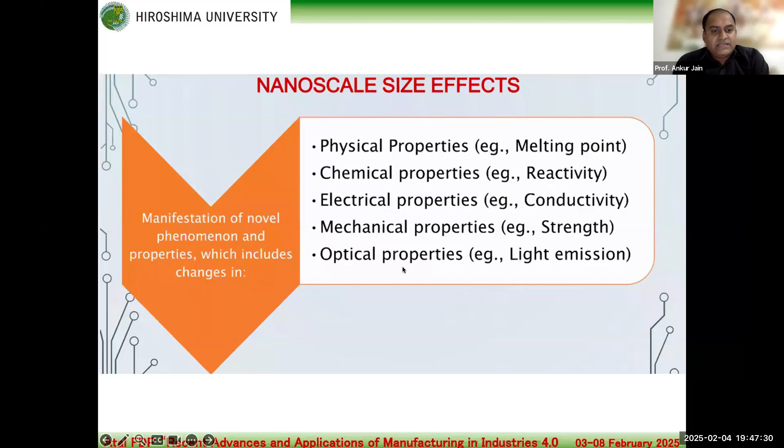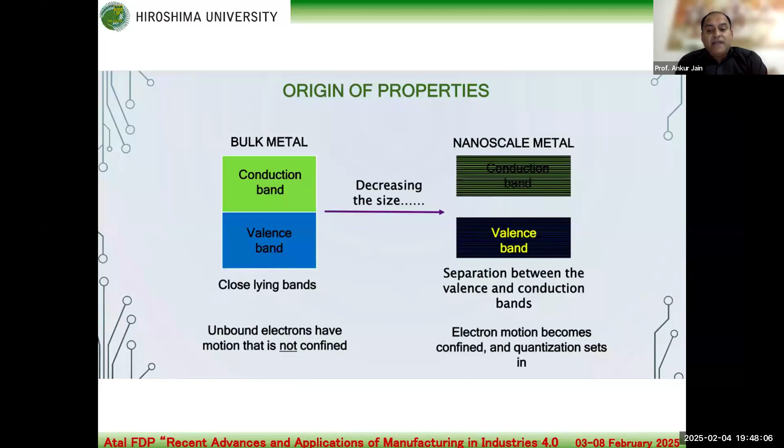Why does this variation in properties happen? That can be understood using the valence band model, band theory. If you talk about bulk metal, the conduction band overlaps with the valence band. They are close lying bands, and the unbound electrons have motion that is not confined in these bands. But when we decrease the size, there is a gap created between the conduction band and valence band. There is a separation created between these two bands, and then electron motion becomes confined, and that originates the quantization set in.

Now, how do these properties vary? We can take an example of gold, which is a very good example for nanocatalyst. If we talk about bulk gold, this is a shiny yellow metal, but when we reduce the size of gold particles, the nanoparticles appear red in color. Now, bulk gold does not have any catalytic properties. However, when we go down to gold particles of size 3 to 5 nanometers, they show excellent low temperature catalyst activity. So this is the beauty of nanomaterials and nanotechnology.

There are 4 important parameters to define the nanomaterial, nanotechnology. These are size - when we reduce the size, it is termed as nanotechnology. There are several shapes available - there can be nanosphere, nanoplate, nanocube, nanorods. These are some examples of material, the types of material, the morphology of material.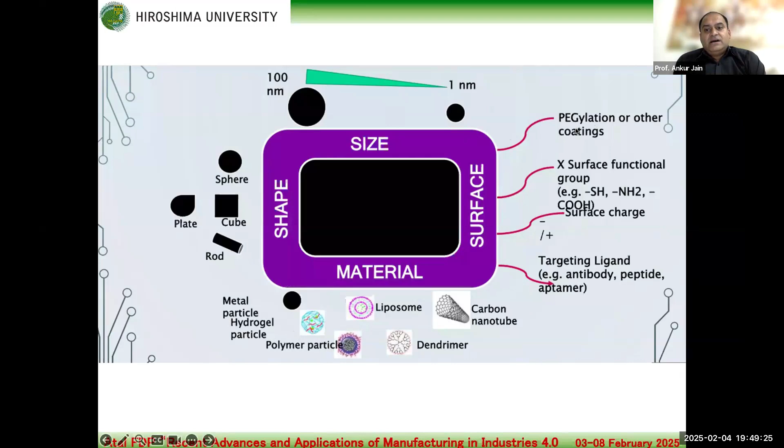There are, for example, metal particles available. There are hydrogel particles available. There are polymer particles, liposomes, carbon nanotubes. So there are multiple morphologies available for the nanomaterials. And these are the surface properties which are listed here.

Now, what is the use of nanotechnology?

Because this FDP is focused on the use of nanotechnology and advanced materials in industry, this section will briefly describe how nanotechnology is being used in different industries.

Here is the list of industries where nanotechnology is being used, starting from food industry, agriculture industry, oil and gas industry, consumer goods industry, aerospace industry, chemical industry, construction industry, nanotech in biotechnology, nanocomposites, electronics industry. You can see there is no industry left behind which is not using nanotechnology in some aspect. Even the energy sector is not untouched from nanotechnology.

I will briefly introduce how this nanotechnology is important for different industries. First, we will talk about food industry. The main areas in food industry are to change the food characteristics, to package food using nanotechnology, to produce food, and also the processing of this food.

Very recently, a nice terminology has evolved called nano food. Nano food is not only about nanoparticles being eaten, but the preparation involving nanotechnology, and that's why it is called nano food. So nano food is defined as food using nanotechnology techniques or tools, starting from cultivation, production, processing, or packaging.

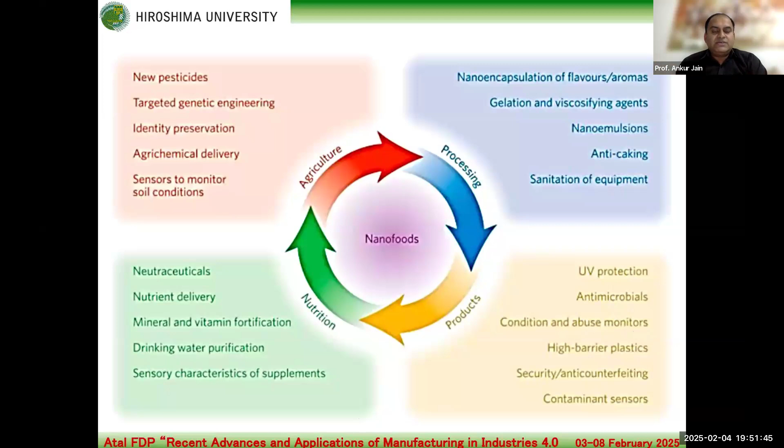More precisely, you can start from agriculture, where nanotechnology is there, then the processing of food, nanotechnology is again there, and finally when we receive the products, UV protection or antimicrobial conditions and abuse monitoring are now all dependent on nanotechnology. That's why the food industry is also dependent on nanotechnology these days.

Now, second part, agriculture, which was partially discussed in the previous slide. To make farming more precise, we are using nanotechnology. There are nano delivery systems which are really advantageous for the agriculture industry.

Now, the third one is oil and gas industry, where we are using a lot of applications such as sensors, coatings, nanomembranes, nanofluids, and nanomaterials for drilling and completion. These are some aspects being used in oil and gas industries these days.

Now, the next one is consumer goods industry. The areas of application include surfaces and coatings, textiles, cosmetics, and sports.

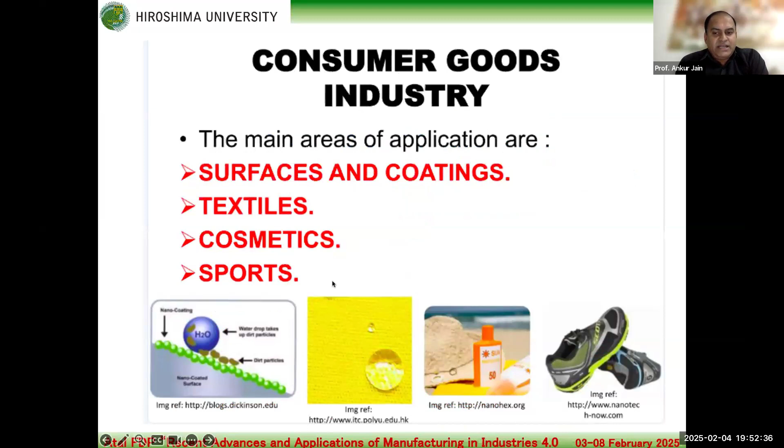The next one is aerospace industry, where, as I showed in the example of advanced materials, titanium is one material which can replace steel because it is lightweight and stronger than steel.

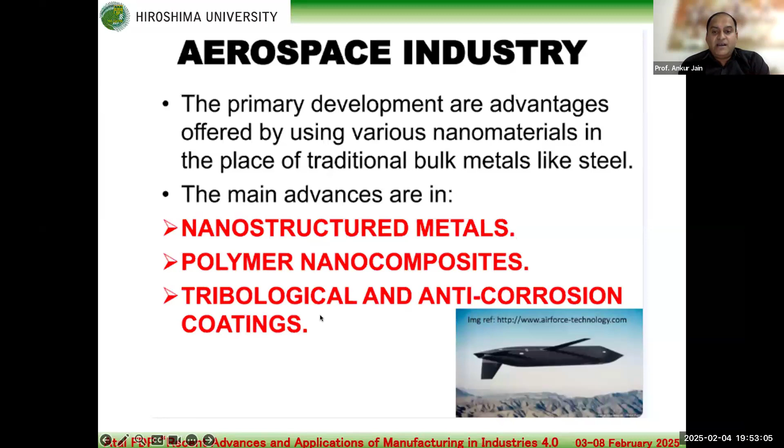So here is the advantage. For example, in the aerospace industry, we can build nanostructured metals, create polymer nanocomposites, and also tribological and anti-corrosion coatings, which will be helpful for the aerospace industry.

The chemical industry has a very good application related to the catalysis process. When we lower down the size of any material, it can work as a catalyst for one or other application. This is possible, and platinum is a very good example - platinum nanoparticles are being considered in almost every second catalysis application.

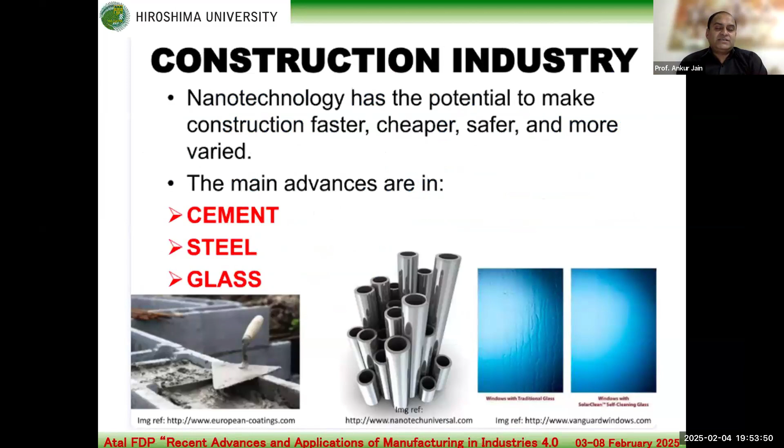Okay, now coming to construction industry. We are producing cement, steel, and glass using nanotechnology again. They have potential to make construction faster, cheaper, safer, and more varied.

Now, nanotechnology in biotechnology. Biotechnology is itself a refined form of biology, and when it combines with nanotechnology, it has several other advantages. For example, drug targeting, accumulation at higher concentration than normal drugs, increased permeability, selective localization, and overcoming the presence of the blood-brain barrier.

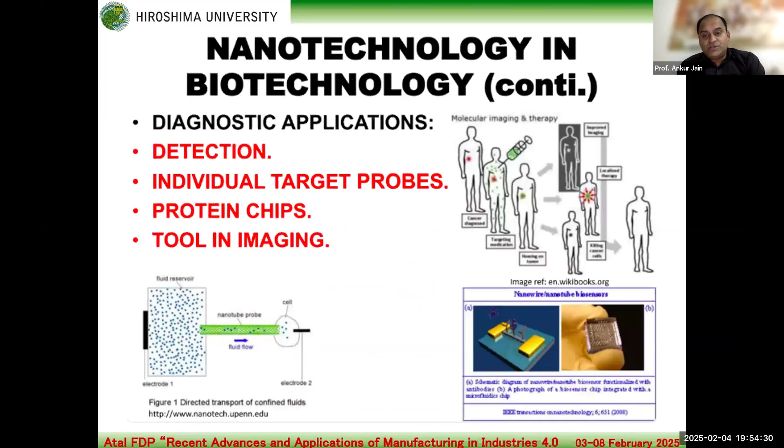Further, there are some diagnostic applications. We are using nanotechnology in detection, individual target probes, protein chips, and also in imaging tools.

Then therapeutic applications - we are using nanotechnology in drug delivery, gene delivery, biomolecular engineering, biopharmaceuticals, as well as several drugs also.

Because nanotechnology on one side is very beneficial, there are certain hazards also which are really important to discuss when talking about biotechnology. There are several hazards - for example, if ingested, nanoparticles can reach circulation and different organs, and that can harm human beings very badly.

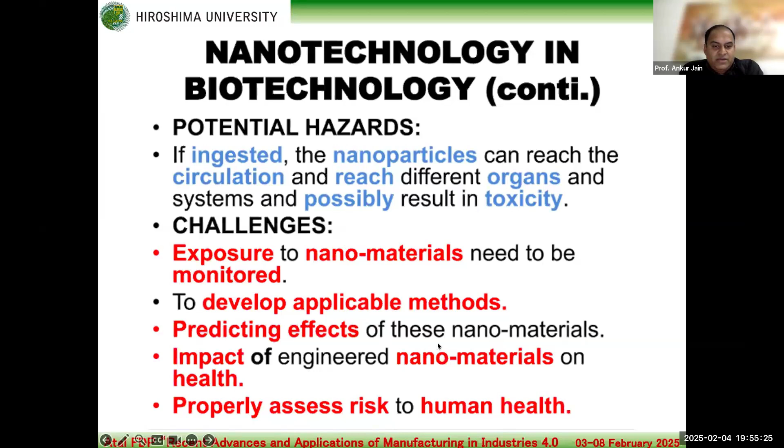Okay, so these are some challenges. Exposure to nanomaterials needs to be monitored very carefully. We need to develop applicable methods to detect these nanomaterials, predict their effects, and understand the impact of engineered nanomaterials on health. Then, nanotech in composite material.

The trend in composites has been to use nanomaterials as a kind of super filler in polymer resins. These polymers can achieve the same performance properties as traditionally filled resins, but with a smaller filler volume fraction, which saves the total volume used.

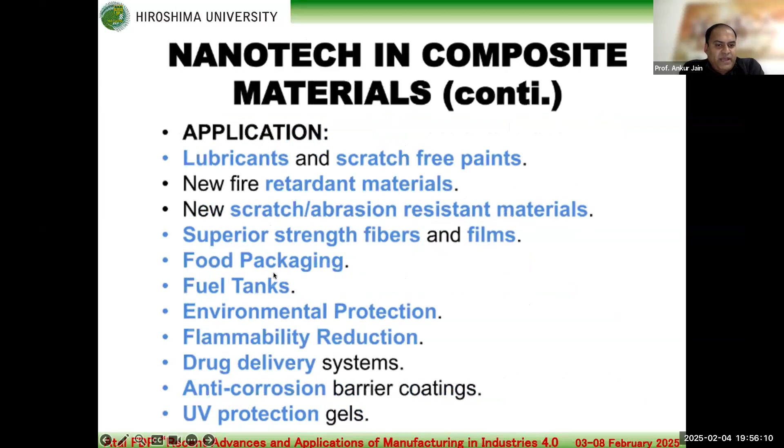There are several applications for these composite materials. For example, lubricants and scratch-free paints, new fire retardant materials, scratch and abrasion resistant materials. They can be used for food packaging and other applications as well.

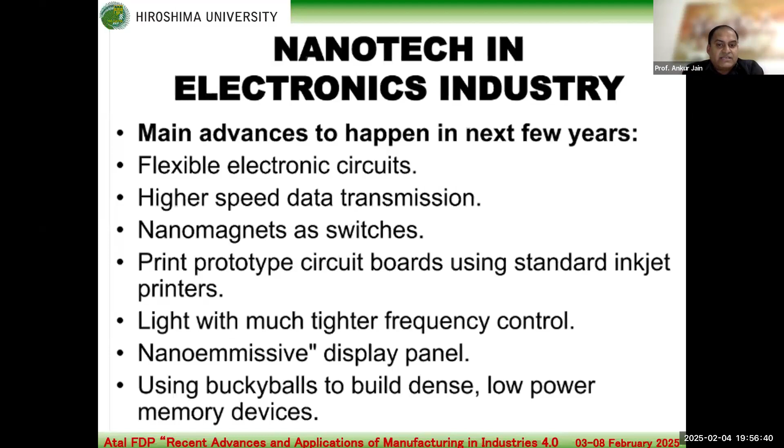Now, if we talk about electronic industries, this is very famous. The use of nanotechnology has drastically revolutionized electronic industries. The main advances in coming years will be flexible electronic circuits, so we will have flexible mobile phones. We can use higher speed data transmission, nanomagnets as switches, and several other applications in electronics.

If we are talking about energy production, we can utilize it in solar economy, hydrogen economy, biofuels, and thermoelectricity. In all aspects where we are producing energy, we can utilize nanotechnology.

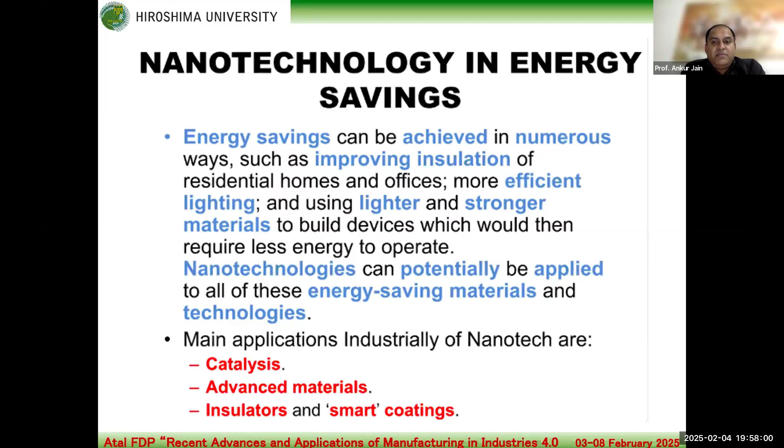Energy savings can also be achieved by improving insulation of residential homes and offices, more efficient lighting, and using lighter and stronger materials to build devices, which would then require less energy to operate. Industrially, the main applications involve catalysis, advanced materials, insulators, and smart coatings, which can be utilized for saving overall energy of our houses or offices.

Energy distribution is also a very important aspect of the energy economy. We can replace the current copper-based wires with quantum wires, or armchair quantum wires, that can really revolutionize the electric grid. We can improve electrical conductivity efficiency, which is quite high compared to copper, at almost 1/6 the weight. These quantum wires are lightweight and stronger than steel, so they can solve many problems existing with copper grid wires.

We can also utilize high temperature superconductors that become superconducting near liquid nitrogen temperature, compared to conventional superconductors which behave at very low temperature, around 4 Kelvin (liquid helium temperature). This can also be developed using nanotechnology, converting the structure to show superconductivity at comparatively higher temperature, useful for our day-to-day operations.

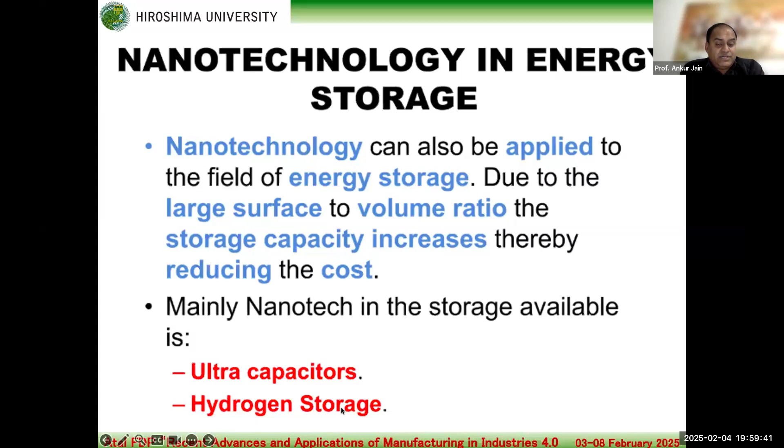Now comes energy storage. Nanotechnology can be applied in this field because of the larger surface to volume ratio. The overall energy storage capacity can be increased drastically, which helps reduce overall cost. Two examples are ultra capacitors and hydrogen storage - these are two fields where we can effectively use nanotechnology.

Now, when we talk about nanotechnology or nanomaterials, it is really important to assess it. It is important to understand the risks involved, and we need to manage those risks effectively. The first thing is assessment.

The second category is fullerenes, which can be used in mechanical and tribological applications, and as additives to grease. There are also carbon nanotubes and nanostructures, including single wall and multi-wall carbon nanotubes, utilized as additives for polymer composites, electronic field emitters, batteries, and fuel cells.

Finally, the last field is compound semiconductors, which can actually change the electronic world and optical devices. Now, what are the risks? When we talk about risk, the main stakeholders are humans and the environment. So there are two things where we have to analyze the effect - the risk involved with human life.